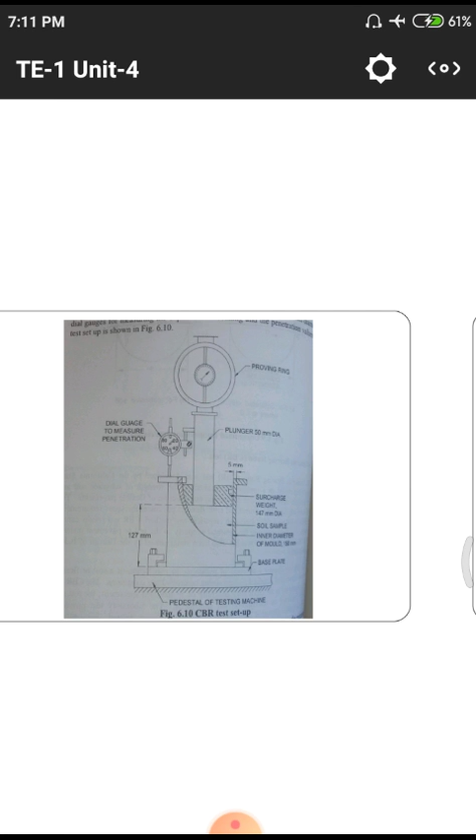On one hand, we apply pressure on the soil sample using this plunger rod, and that pressure is observed with the top dial gauge at the same time. We need to observe the amount of pressure obtained on the soil sample, and relatively the displacement also, using these dial gauges, so that those two help find the bearing pressure of the soil.

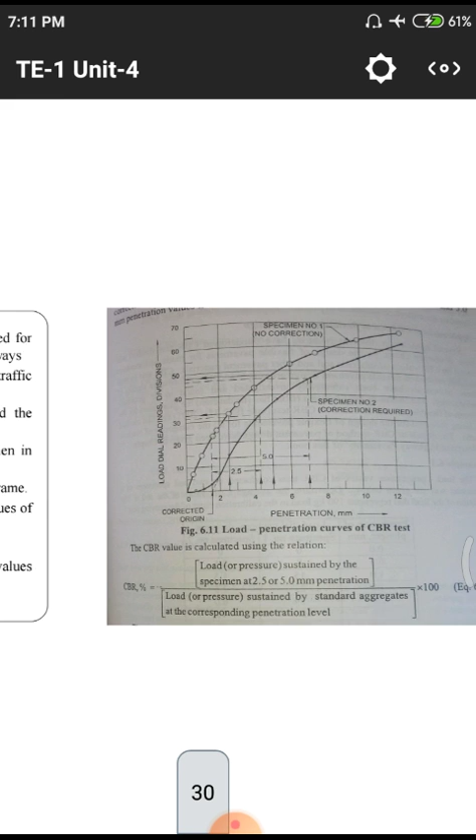This is the formula for calculation of CBR value. Load divided by normal load of a particular aggregate into 100, that gives directly the CBR value.

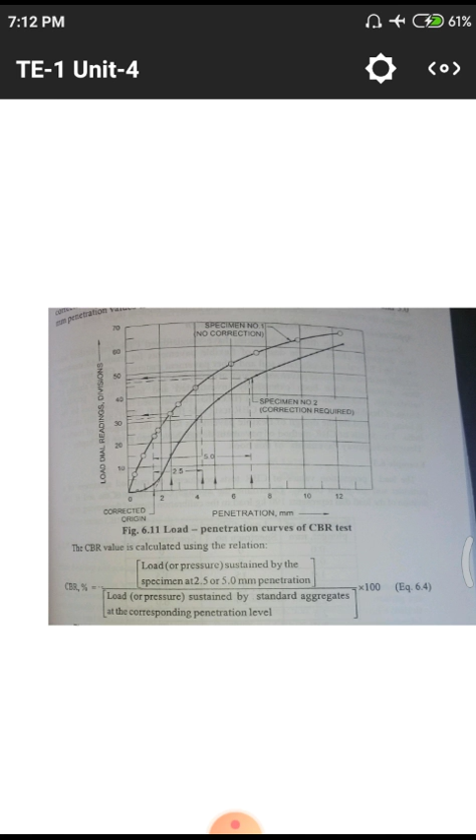Load means at 2.5 and 5 mm settlement, we need to find out the loads, relative to the same decrements of a particular constant aggregate. Those two things we take and observe one by one. First we take the soil sample value divided by the aggregate value into 100, that gives the CBR value.

In this plate bearing test, we have to use four kinds of diameter plates: 300 mm, 450 mm, 600 mm, and 750 mm. Each ring has some dial gauges, so we observe the quantity of pressure on the plates with the help of these jack systems.

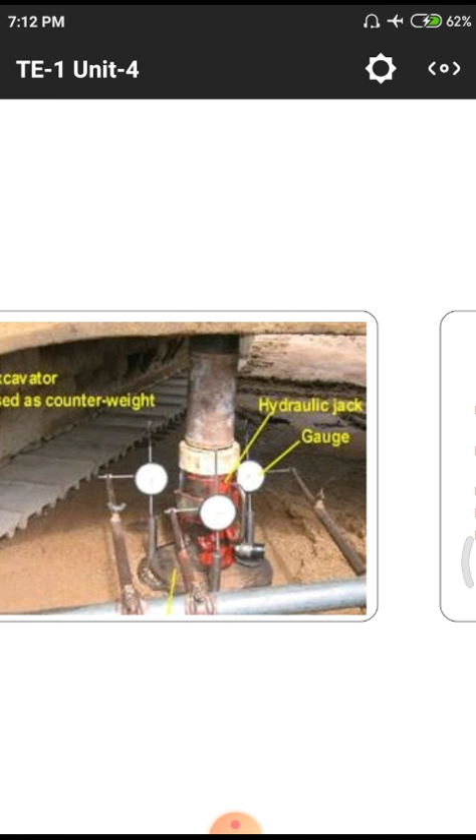After that we need to note down the settlements with respect to the plates: for 300 mm diameter, what is the settlement; for 450 mm diameter, what is the settlement. Likewise, for all four plates we take those measurements.

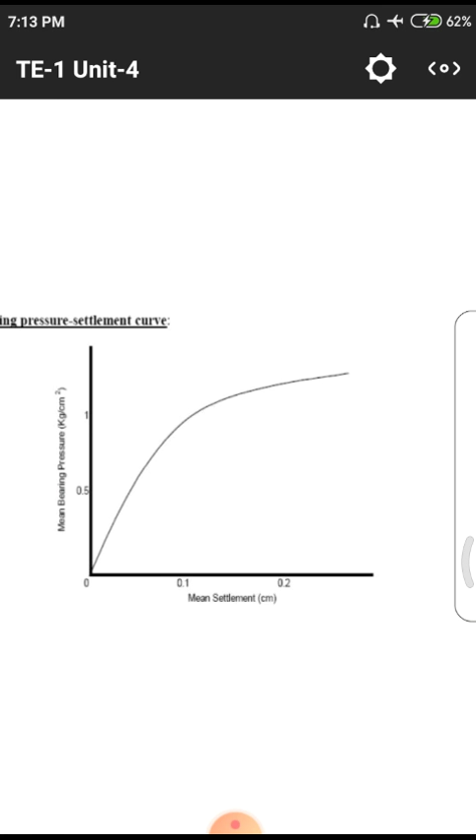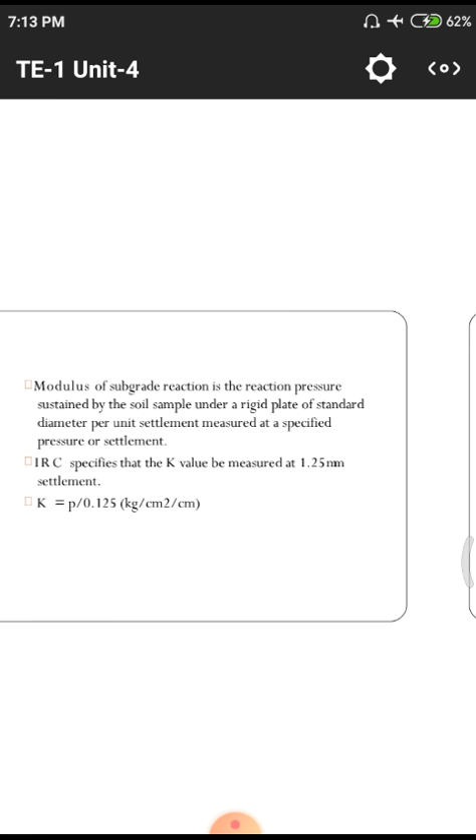These are the curves obtained after the readings are taken, simultaneously plotting load and settlement. We draw a graph like this, and after that we find the k value, that is the constant value, load by settlement value.

We need two specimens, one with soaking and another without soaking. We observe the difference between the soaked sample and the unsoaked sample. Those are the two tests: the plate loading test and the California bearing ratio test. Both are observed on soil samples only.

Why? Because the total portion of the road will be laid on the soil sample, so we need to observe whether that load will be borne by the soil or not.

Likewise, after the bearing pressure tests are over, we need to go for tests on aggregate. Why? Because the total compressive stresses will be borne by the aggregates, and after the aggregate layer, the total stress goes into the soil sample.

So the first major part of application of stress is the road sample. On the road sample, what kind of aggregates are we using? Are those strong or weak samples? We have to find this out. First of all, what are the objectives involved with these aggregates? There are totally four kinds of objectives.

First is the role of aggregate. This means we need to know what work the aggregate does there - whether it is in an active condition or a passive condition. Active means the total aggregates are involved in the particular stress distribution. In some cases, aggregates are not involved in the stress distribution, they are simply in a passive condition. So we have to find out whether it is active or passive.

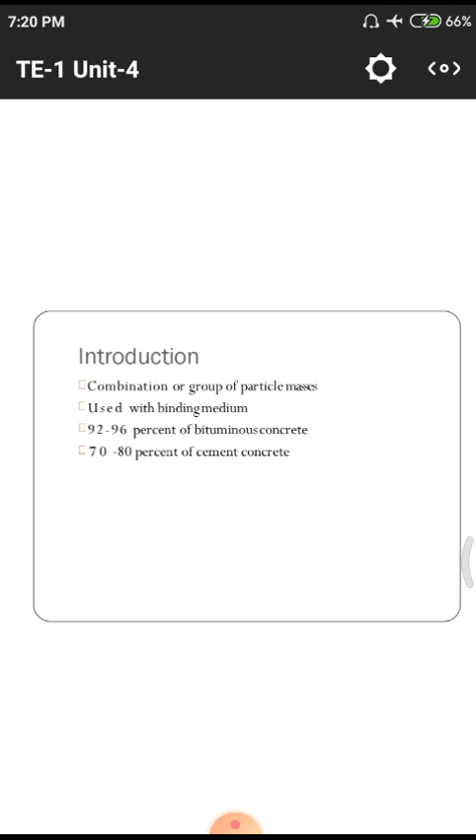Normally bitumen is obtained as a waste material from the petroleum industry, so we use it as a filling material for the construction of roads. After that we have 70 to 80% cement concrete, meaning flexible pavement and rigid pavement. In flexible pavement we use bituminous material, and in rigid pavement we use cement concrete. Rigid pavements are used in areas having a huge amount of friction to counter accident occurrence.

So that 70 to 80% of aggregates are used in rigid pavements. Next, what are the sources we have? Normally there are two kinds of sources. The first is the natural source, obtained from large rock formations by quarrying. Quarrying simply means that if there is a natural resource, we use those natural resources for our construction activities and daily utilities, whether for building work or any other work, so we do quarrying.

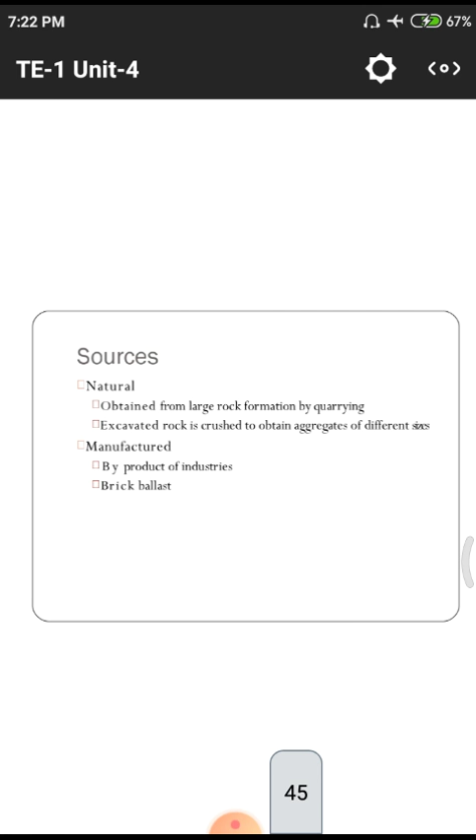Quarrying means a large mass is converted into small pieces simply by blasting. After that, grinding and other processes take place. The excavated rock is crushed to obtain aggregates of different sizes. At the time of blasting, we obtain large size masses of material. After blasting is over, we transport those large masses to the grinding agencies, which feed them in and convert the large masses into small pieces of the required sizes.

After the required sizes are obtained, we allot those sizes to different fields. For construction purposes or boulders, we normally require 40 to 60 thickness rocks for filling the ground surface. After that, 40 size aggregates are normally used for the construction of slabs, 20 size aggregates are used for beams and others, and 10 to 5 size aggregates are normally used for filling purposes in different construction utilities.

Next, manufactured sources. Nowadays we have a huge quantity of industries, mainly thermal power plants, steel industries, and aluminum industries, along with different metal industries. In those metal industries, we mainly use ore materials for the purpose of generating iron, aluminum, copper, or other metallic elements.

After the metallic element process is over, we get some quantity of waste materials from the industries. All those waste materials are simply dumped on the earth's surface with no further use, which uses up a quantity of land and causes some disturbance. Automatically, whenever there is rain, a huge amount of wind flow, or huge heat due to external environmental parameters, all that matter will cause a huge amount of pollution to the environment, so we have to use it properly for our construction purposes.

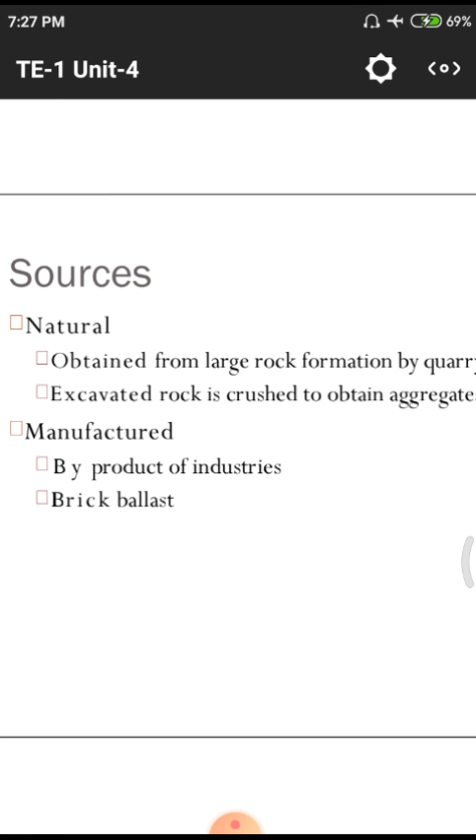That means normally we are using these bricks for the construction of walls and other retaining parts in our houses, so these will occupy more volume in the structure, so we are using a huge amount of these bricks in our construction and daily usage. While preparing these bricks, we are having some quantity of waste in the form of this brick ballast. These things also we have to use in our construction, roads and other things, etc.

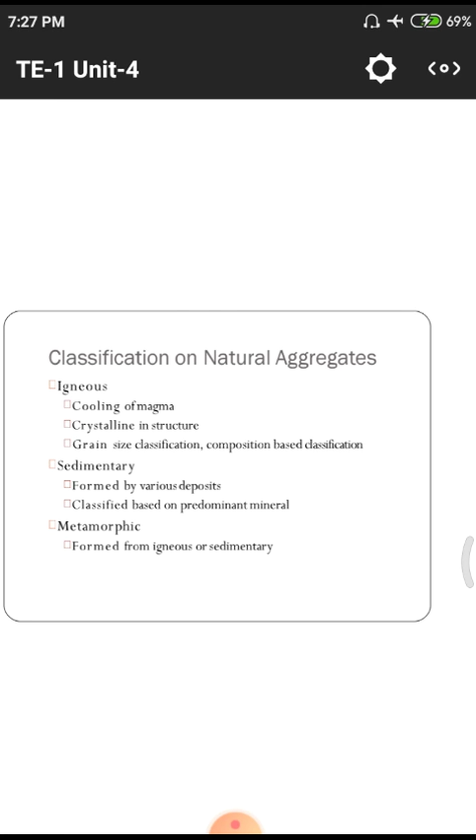Next one, what are the aggregates we are having? All those things are the different kinds of aggregates. First one we are having igneous. Second major one we are having sedimentary. After that we are having metamorphic. Those three are the stages. Igneous means at a huge amount of temperature. Normally we are having these volcanoes. Volcanoes will eject some quantity of magma when there is a blast. Automatically with the magma there may be some amount of gases and ash also coming, so we have to use that volcanic ash in the replacement of cement, and the other gases are directly fed into the environment.

After that we have to cool that magma, and after the cooling is over, there may be formation of rocky strata. Those rocks we simply call igneous rocks. First of all we are having a cooling of magma. After the ejection of magma is over, the magma will be cooled for hundreds of years, or fifty years, until the cooling is over. After the cooling is over, we have to use that cooled magma as aggregates.

Next one, crystalline in structure. Crystalline means we have to use that magma in different areas. In our construction we are having different particle sizes, so according to those particle sizes we have to divide that magma into a number of parts. Simply we need to classify large rocks, then small rocks, then fineness values. All those things come under crystalline in structure. If the magma is of a very good and reflective nature, automatically it is crystalline. If the magma is not crystalline, it is not shiny, and we use it for another purpose of construction.

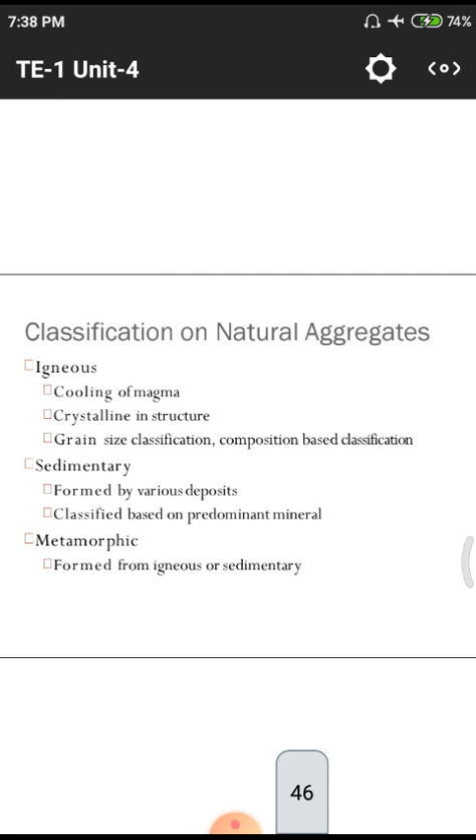After a few years, due to wind, water, temperature and other atmospheric features, the total decay or deposition takes place. That is called metamorphism. Metamorphism means due to external parameters some decay or deposition takes place. That is called metamorphism, formed from igneous and sedimentary rocks.

What are the desirable properties? A desirable property is clean and free of clay and organic matter. Desirable means we require those features. It requires mainly clean and free of clay. Normally clean means without any impurities. If there are some impurities in the structure, automatically due to those impurities the decay will take place year by year.

Normally if there is a steel structure, the steel structure will be placed in the atmosphere, exposed to the sun's radiation, rainy water and other gases. That means in the atmosphere we are having some quantity of dew factor.

In cricket language, normally we feel this dew is there on the ground, so the ball was skidding and more runs are coming automatically due to this dew factor. This dew factor also has some importance in our structures. Why? Because due to this dew, there will be some quantity of water vapor.

Why? Because in the morning session we are having the sun's radiation on the atmosphere of our earth, so whatever water we have on the earth will be converting into water vapor due to the temperature. That water vapor will be moving over the earth. Why? Because water vapor has less gravitational force, so that water vapor will be converting into clouds

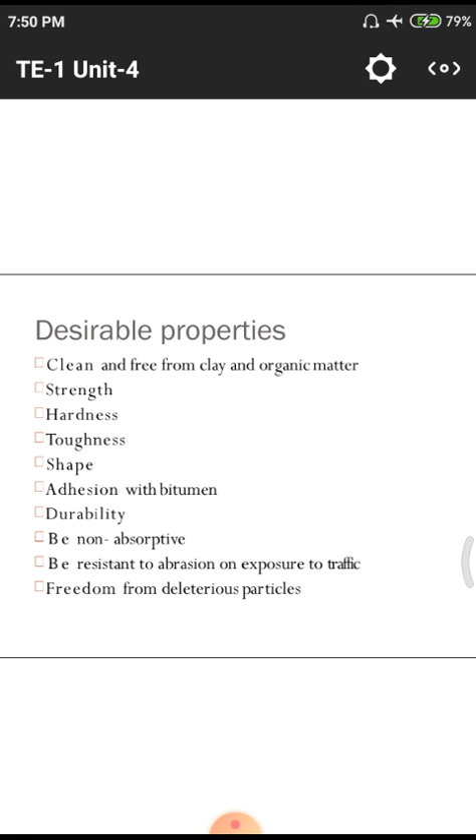Next one, freedom from deleterious particles. When we pour some quantity of acid on a surface, we will observe bubbles coming from the material. Why? Because the acid will leach the surface and react with it. That means chemical nature. Due to those acid attacks, the surface will decay, so we need to prevent using those kinds of deleterious particles in the structures.